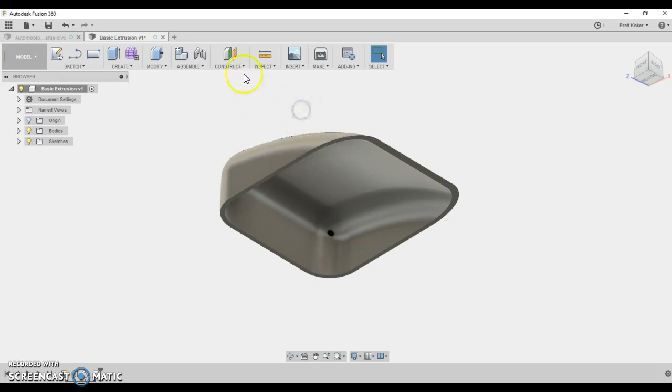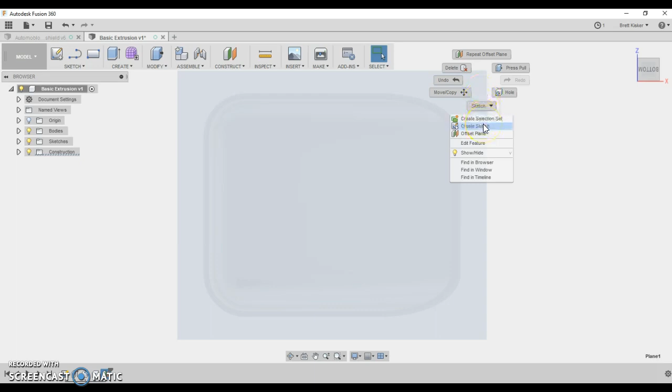And with that in mind, I'm going to construct an offset plane. I'm going to start at the bottom of this surface and I'm going to drag downward 0.67 inches. And so if I look at this from the side, that gives me a base that I'm going to draw from. So I'm going to come over here now, rotate upward. I'm going to click on this and I'm going to create a sketch on that plane. So I'm drawing on that surface that I'd drawn out in the middle of nowhere.

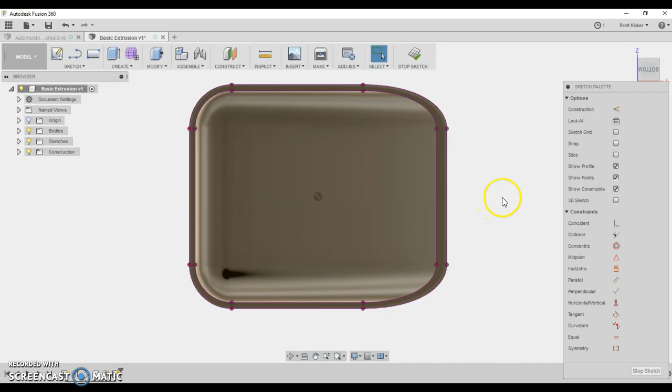Okay, a couple of things that I want to do now. I'm going to hit P to project some geometry, and I'm going to drag click on the outline that we've already created. This turns that outline purple, and it means that I can dimension to those points that maybe I was not going to be able to dimension earlier. I'm going to draw a simple rectangle. I'm going to be careful about not lining it up with anything else, because I don't want to constrain myself to anything in particular at this moment in time. Notice that it's entirely blue. Everything here can float around.

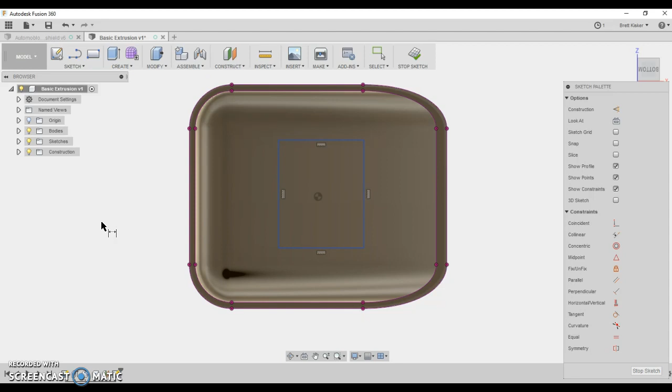And I'm just going to go through and add the dimensions from the dimension sheet as I see them. I'm going to pause the video so you don't have to watch me dimension everything, but really all I'm doing is adding dimensions for the outer rectangle that you see here, and then I'll unpause the video when I get done. Okay, so you can see I have the thing completely dimensioned here. That took 4 dimensions, 2 from the very bottom and 2 from the very left, according to the dimension sheet, and now I have that thing fully locked down, fully in place.

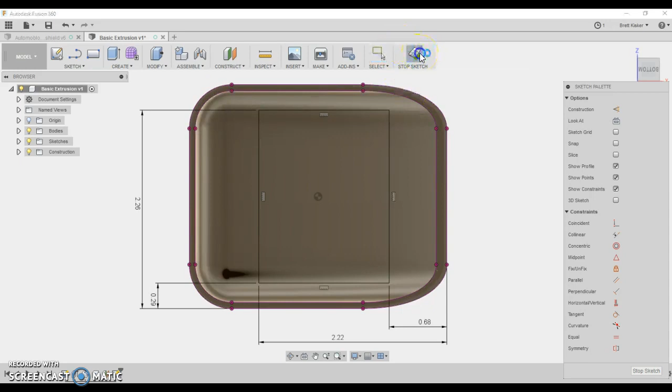Okay, so now the next step, and I would recommend at this point in time that you stop your sketch. You come over here to a good view from the bottom, and we're going to extrude this upward. Here's the profile that I want, and I'm going to extrude this direction, but I don't want to cut away material. I actually want to join material together, join the two pieces together. You can also see that I have an issue here because of the curvature of the top. I don't want to go all the way to the top.

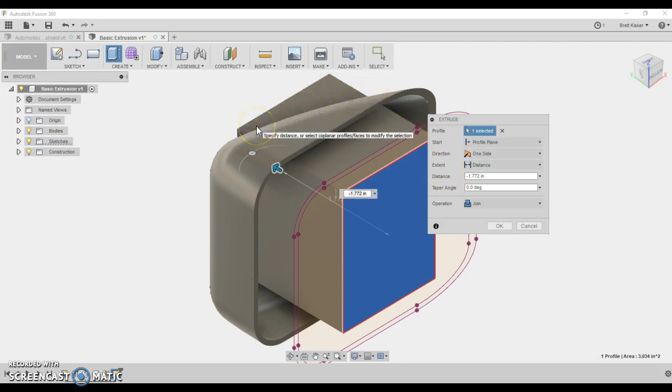So instead of saying distance, I'm going to say to object, and the object that I want is the bottom surface of this. Now whenever I click OK, I can see that it's locked to the top. It goes all the way to the top no matter which surface I look at, right? You can see that, and I have a solid body. So that's the next step in the process.

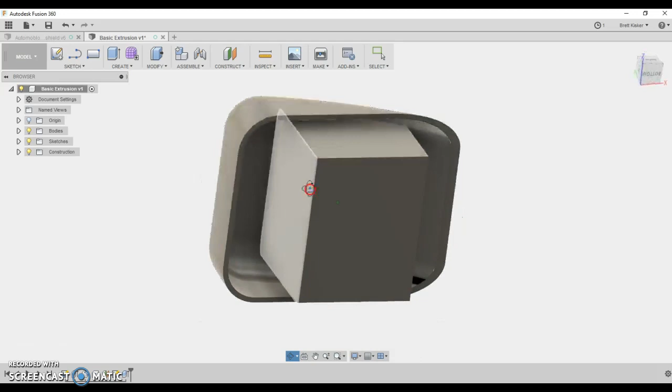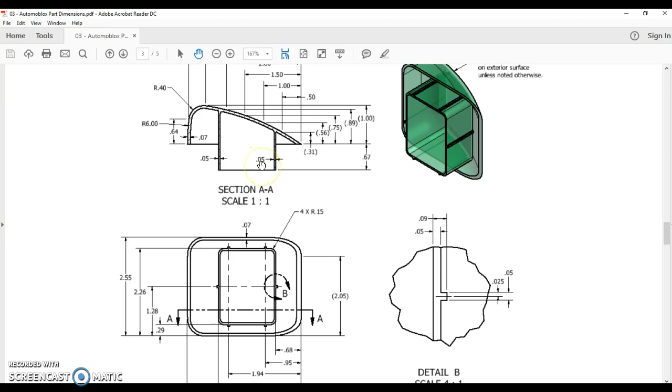So now that you have this block extruded, we need to do some stuff with it to make it a little bit more like what we see here. You'll see that it has rounded corners, it's hollowed out, and we have these little tabs. So that's our next step. Notice that the radius of curvature here is 0.15, that's for the 4 corners. And notice, right here, this is important to mention, we can see that that shell at the bottom is 0.05 inches thick. So we're going to worry about that next as well.

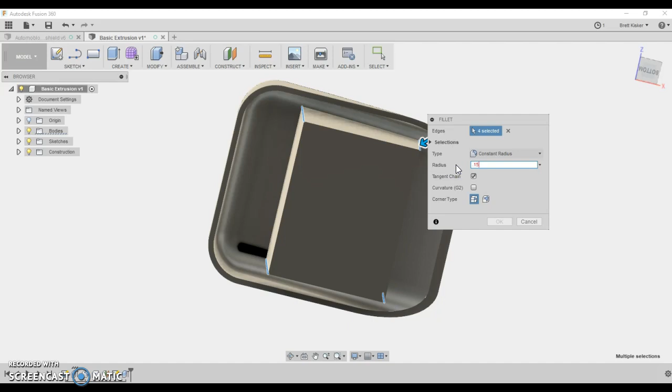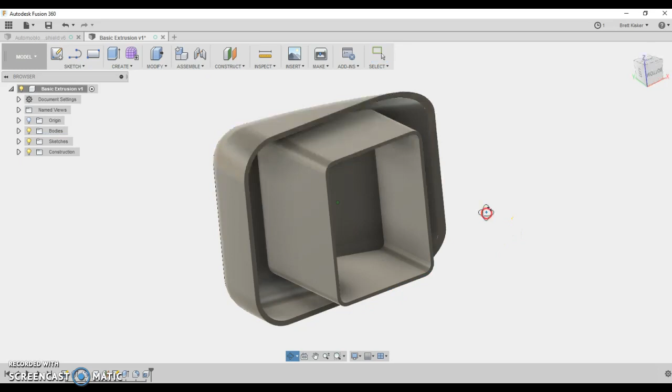So let's come over here, and we have to do it in this order. We're going to fillet the corners first, okay? So I'm going to hit F for fillet. I'm going to grab 1, 2, 3, 4 edges, and change the radius of this to 0.15. Now this is rounded, and now I can shell out the exterior from the bottom. I'm going to switch back to this view, modify, shell, from the bottom face with a thickness of 0.05. Click OK, and we have the second part of this done. It is shelled out, it's curved, and it extends all the way upwards.

So that's pretty slick. Okay, I'm going to cut off this video right now, and I'll start another video to add the tabs at the bottom, and then we're probably going to have a 4th video where we change the physical appearance of it so that it's see-through and green and polycarbonate like it's supposed to be.